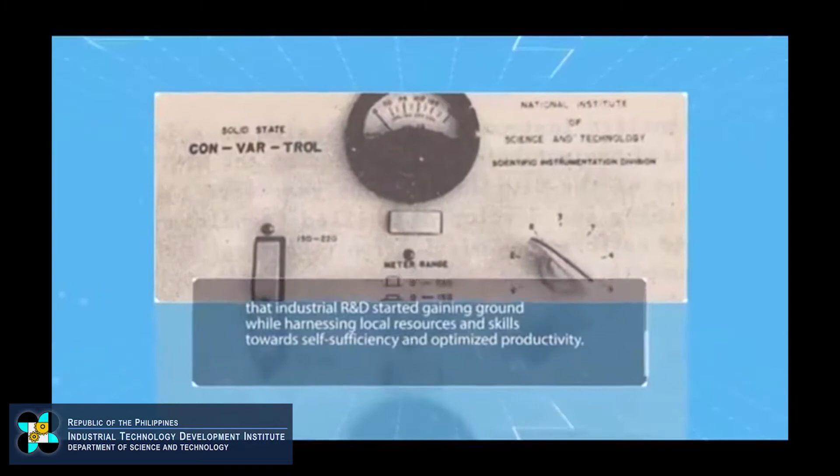It was 1958 when the Bureau of Science became the National Institute of Science and Technology, NIST, that industrial R&D started gaining ground while harnessing local resources and skills towards self-sufficiency and optimized productivity.

Industrial R&D went full gear in 1987 when the NIST was renamed Industrial Technology Development Institute, focusing on 4 major functions: research and development, technical services, technology transfer, and custodian of the national units of measure to provide international traceability.

DOST-ITDI research and development covers 5 major areas: food, environment and biotechnology, chemicals and energy, material science, and packaging technology, all aimed at supporting and answering the needs of local industries.

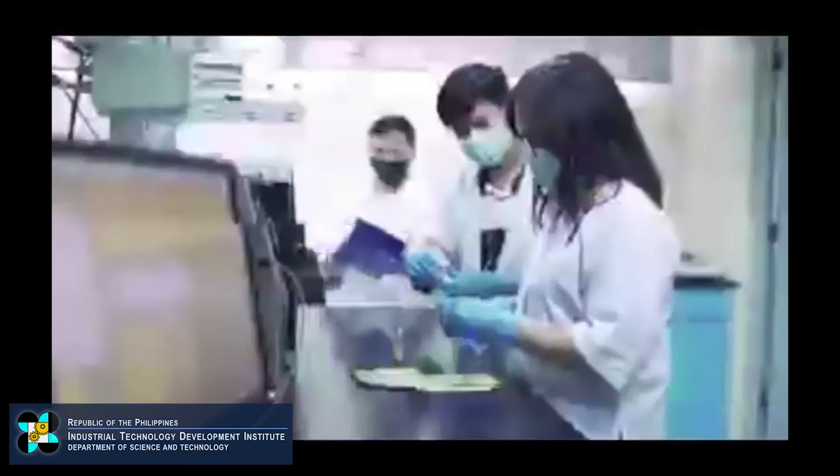Complementing its R&D are its technical services: standards and testing, national metrology, and technology transfer, aimed at harnessing local industries' productivity and competitiveness, and translation of developed knowledge or innovation into the production sector, paving the way for new businesses or startups. As well, DOST-ITDI innovations serve as springboards for businesses to thrive and prosper.

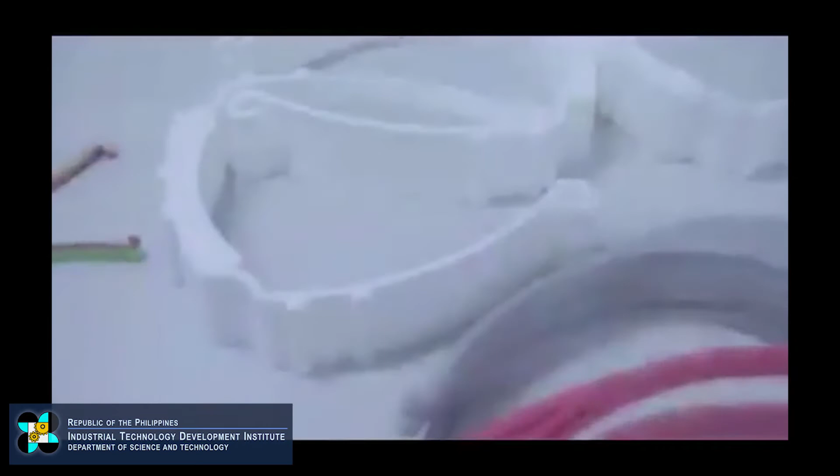At the height of the COVID-19 pandemic, and when most of the country was in enhanced community quarantine, DOST-ITDI bravely rose to the call of duty, distributed ready-to-eat foods such as the Pack of Hope and Mungbean Cocoa Milk Drink to our frontliners in Metro Manila and other regions in the country, produced face shields via 3D printing and donated these to hospital frontliners, developing prototypes and 3D printing critically important parts of hospital equipment, and improved design of N95 masks to better protect the frontliners.

The Institute is also providing interventions for our displaced countrymen who lost their jobs and livelihood by making training available online whenever necessary. And even before this pandemic, DOST-ITDI innovations were critical in rehabilitating communities that experience calamities and even war, and make them whole again.

DOST-ITDI has been preparing for an innovative ecosystem for new knowledge and technology to thrive and help make us ready for Industry 4.0. DOST-ITDI aims to achieve kaayusan and ascertain the future or kinabukasan through its initiatives and help businesses and every Filipino adapt to COVID-19 under the new normal.

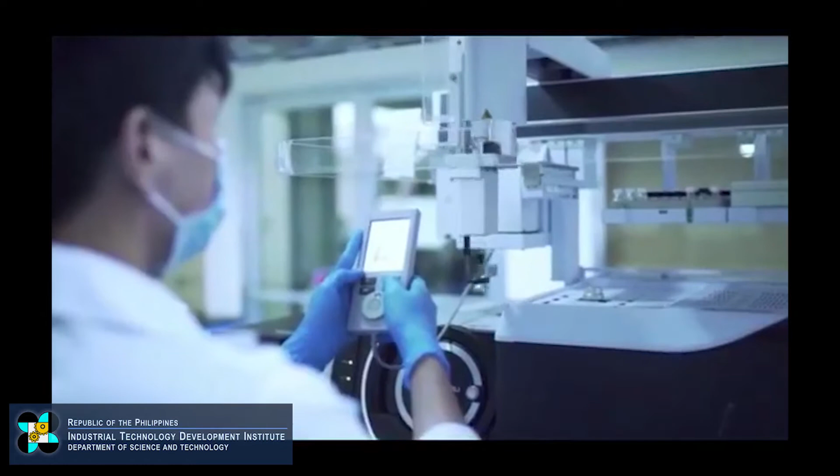State-of-the-art facilities are being established. Construction of the Simulation Packaging Testing Laboratory, SPTL, and Green Packaging Laboratory, GPL, is ongoing. At the SPTL, stress conditions that affect products during transport are simulated that can help mitigate losses during distribution, while produced products can be processed and packed in a green packaging laboratory.

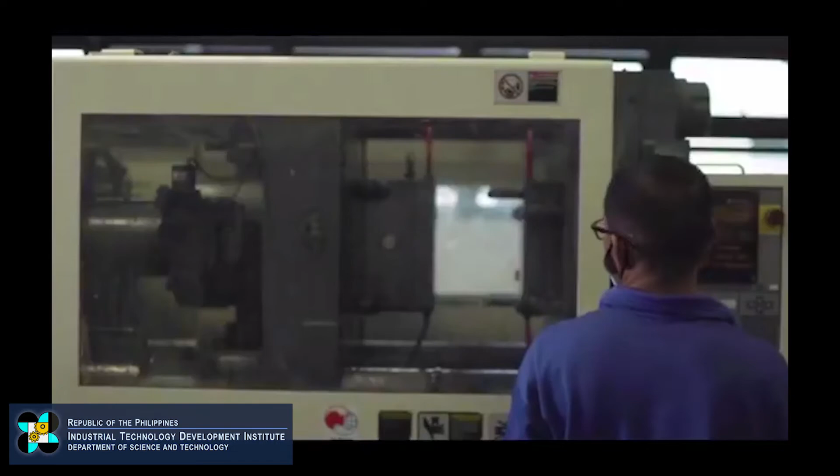AMCen, or the Advanced Manufacturing Center, DOST's 3D Printing Technology Center, is a joint project with Metals Industry Research and Development Center, MIRDC. ITDI focuses on developing multiple 3D printing materials from local materials to reduce cost.

Halal Food Research and Development Facility. With this facility in place, the Institute hopes to develop new food products that are compliant to halal standards and as well support DOST as it responds to Republic Act No. 10817, or the Philippine Halal Export Development and Promotion Act.

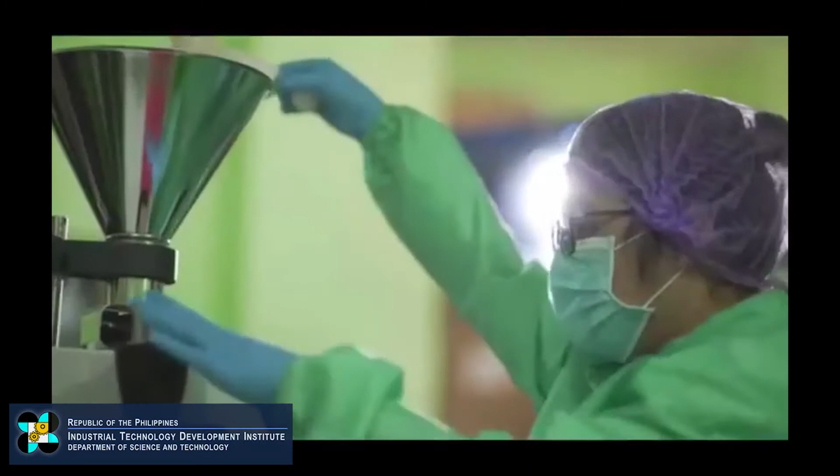Enhancement of the competence and capabilities of the National Metrology Laboratory of the Philippines. Expertise and facilities are being upgraded, and construction of laboratory facilities for metrology and chemistry and biology are now ongoing. It is envisioned that the NML will provide the country with credible measurements and traceability in the fields of physical, chemical, and biological metrology. And with the emergence of the COVID-19 pandemic, DOST response has been decisive.

With the support of President Duterte and the Interagency Task Force for the Management of Emerging Infectious Diseases, the DOST will establish the Virology Science and Technology Institute of the Philippines, or VIP, to be constructed at the new Clark Economic Zone in Capas, Tarlac. The VIP shall be pursuing priority virology research and developing diagnostic kits, therapeutics, and vaccines for diseases caused by viruses, where DOST-ITDI will have a critical function.

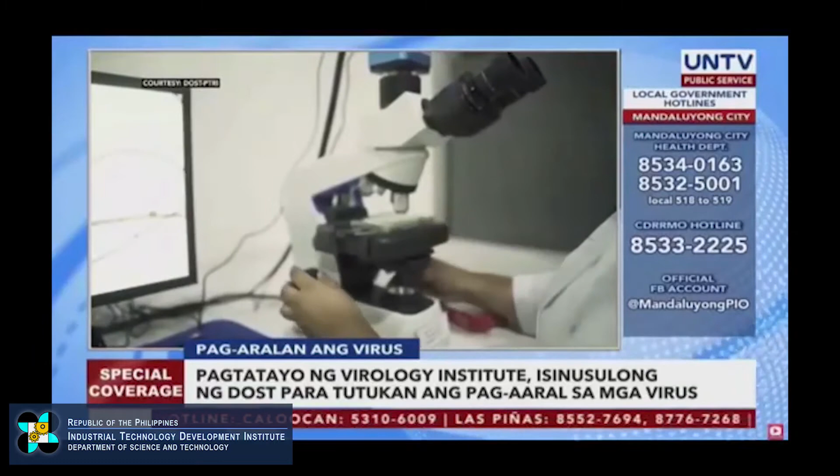From laying the groundworks for science and technology in the country, the Industrial Technology Development Institute of the Department of Science and Technology, through the years, which turned 119 last July, has been consistently providing innovations to industry to help make them competitive, emerging as a credible industry partner. The Institute has been instrumental as well in mitigating hazards and improving the lives of disaster victims and communities to rise again.

With so much optimism with this cooperation and bridging of talents and expertise, we look forward to enhance science, technology, innovation, competitiveness, and the emergence of new research and development capabilities that hopefully will translate into new products, services that meet the current and future needs of our nation and the people.

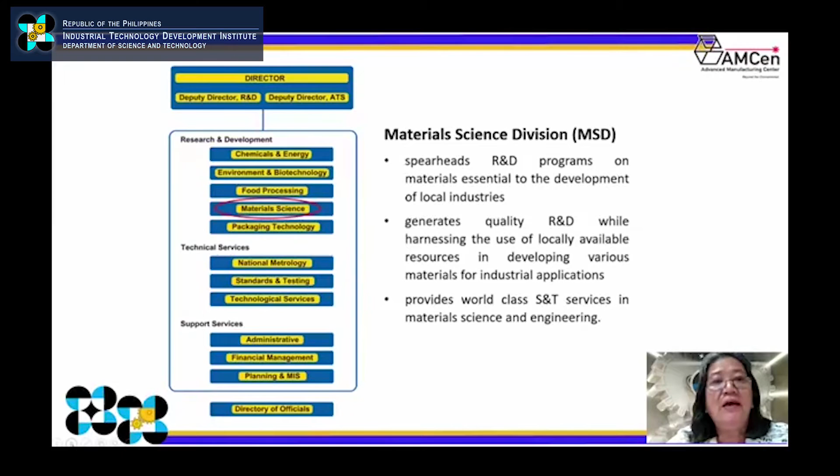The functions of the Material Science Division are as follows: to undertake research and development on material science and engineering, especially in the areas of advanced materials, surface engineering, and special materials; to undertake technology transfer of generated technologies; to provide technical assistance and support services to clients such as industry and academia related to the division's field of expertise; and to contribute in the planning and implementation of the Institute's programs and projects. To perform these functions, the Material Science Division has 3 sections.

The Advanced Materials section undertakes R&D on polymers, natural fiber reinforced nanocomposites, and quantum dots. The Special Materials section undertakes research on ceramics, particularly for water purification and filtration, and mineral processing and utilization for the production of nanomaterials and their applications. The Surface Engineering section conducts research on corrosion, surface coatings, and membranes.

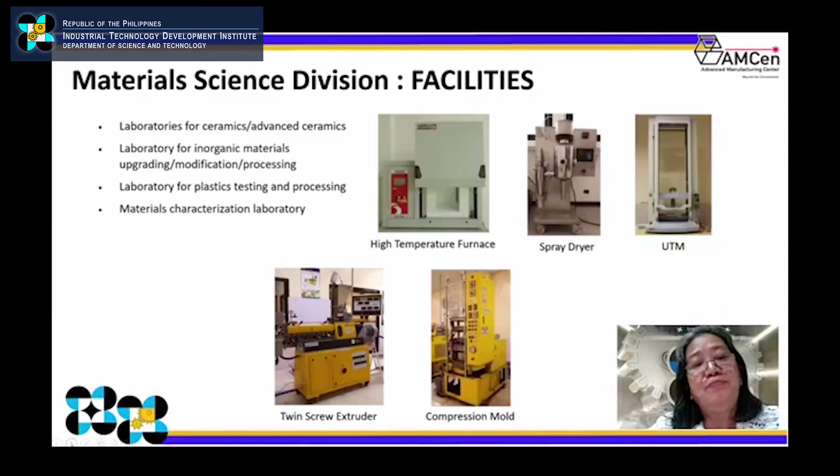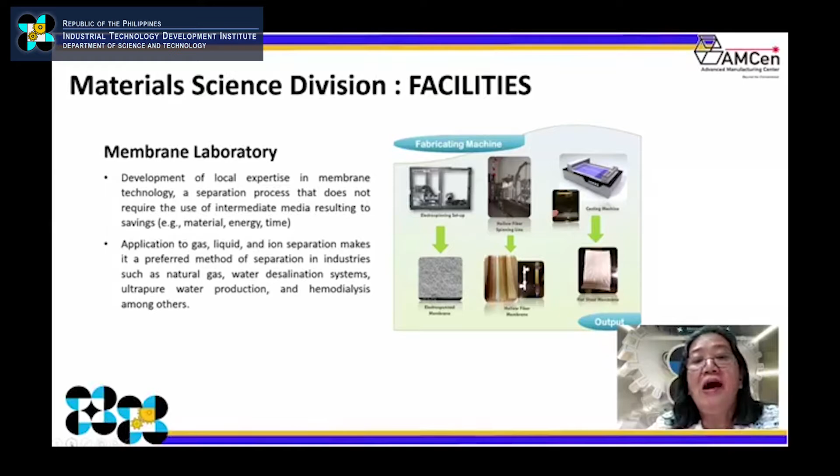Next slide, please. To develop local expertise in membrane technology, a membrane laboratory was set up in 2018, and the following fabricating machines were acquired: a fabricating machine for electrospinning, hollow fiber spinning, and a casting machine, to develop different types of membranes like electrospun membranes, hollow fiber membranes, and flat sheet membranes.

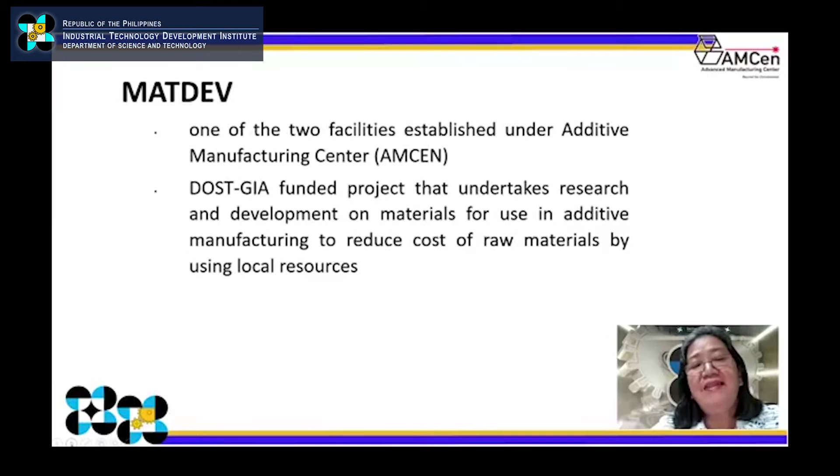I will not talk about this because the next succeeding resource speaker will give you a detailed presentation about the profile, services, and facilities of MATDEV. With that, I would like to end my presentation and thank you for your attention.

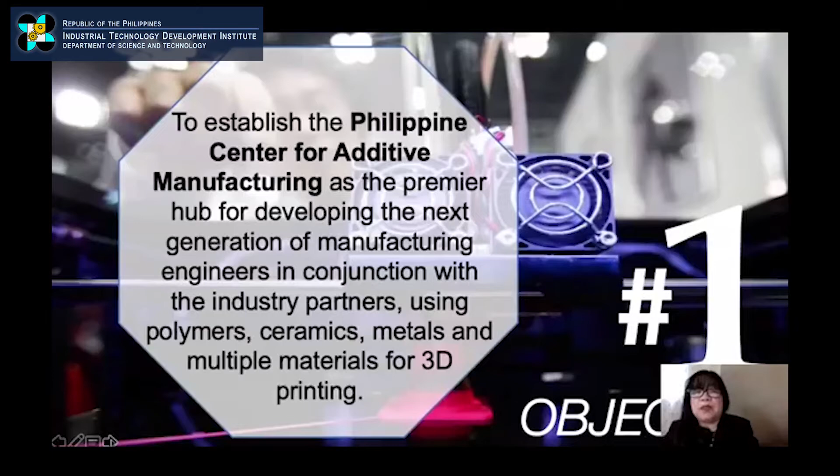The general objective of the program is to establish a national center of excellence in additive manufacturing, or AM, with the following objectives. First is to establish the Philippine Center for Additive Manufacturing as the premier hub for developing the next generation of manufacturing engineers in conjunction with industry partners using various materials such as polymers, ceramics, metals, and multiple materials for 3D printing.

Next is to be the nation's leading research center in 3D printing and achieve prominent and outstanding breakthroughs in the research and development of innovative 3D printing technologies, processes, and materials. Third is to enhance our capability in the design, materials development from local sources, testing, and prototyping of products for additive manufacturing.

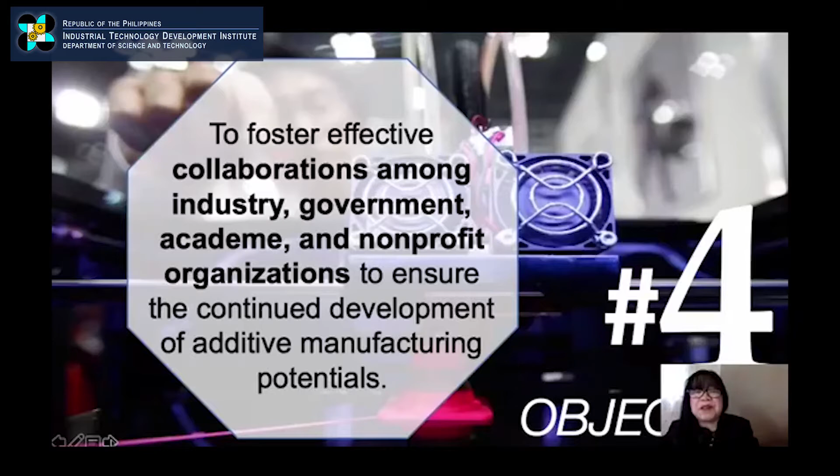Fourth is to foster effective collaborations among industry, government, academe, and nonprofit organizations to ensure the continued development of additive manufacturing potentials.

The following services will be offered by the center: training services on design software, equipment operation of various 3D printing platforms, and materials development, among others. We will also offer materials R&D using indigenous sources, prototyping, materials and product testing and evaluation, R&D collaborations with the academe, industry, government, and private entities, design concepts, policy standards development, and education formation, or for AM to be part of the curriculum.

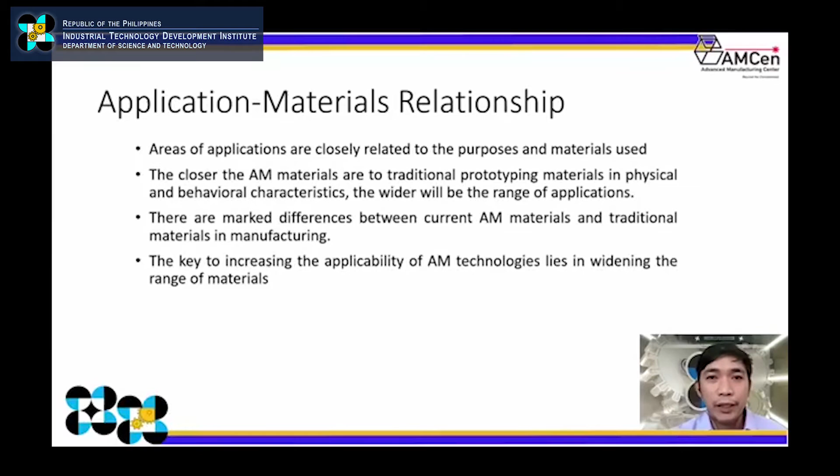Additive manufacturing was also called 3D printing before, and rapid prototyping, and now they can also refer to it as digital manufacturing. Basically, the application of additive manufacturing is limited by the materials. If you want to 3D print something, you must find a material that is 3D printable. So applications need to be identified, and through MATDEV, we can develop the materials we can use for 3D printing the things you want to use or 3D print.

So 3D printing, or the application of 3D printing, depends on materials, and there are three basic classifications of the applications of additive manufacturing: first is design, second is engineering, analysis, and planning, and manufacturing and tooling.

For the design, you need to do some design validation, or sometimes you just need to see something out of a drawing from the CAD, or an ultrasound.

So if they touch it, they will see it in such a way as before it was born. Here, one advantage of additive manufacturing is design freedom.

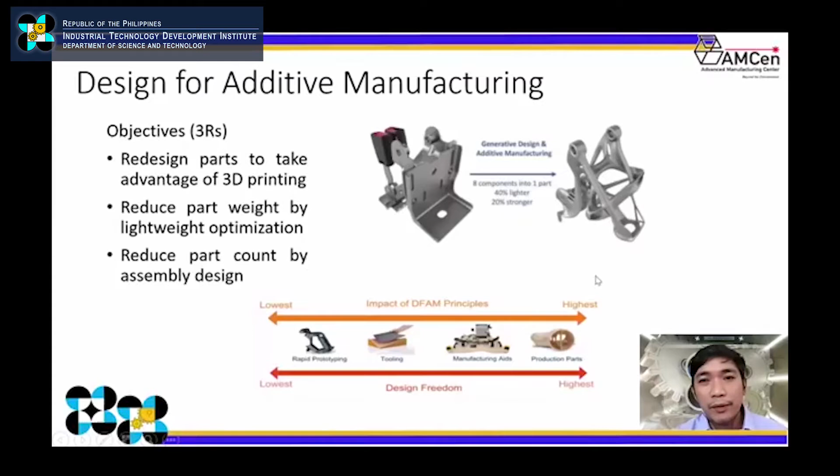Complexity is free. In many cases, like this application, they make use of 3D printing. If you 3D print the usual things, you cannot take advantage of the whole 3D printing process. So what you may do is redesign or do some generative design through artificial intelligence. From this, they reduce the weight by about 40% and make it stronger by 20%, going from 8 components into 1 part, preventing failure at various connections or the screw that is the cause of failure of this particular part.

And they use 3D printing for commercial purposes and sometimes in movies for the effects, using various materials with a colorful effect on the 3D printed products.

Another application of 3D printing. I'm discussing some applications that are interesting, and the application of 3D printing is limited only by your imagination. So if you can think of some applications, that's also possible. That is very, very possible.

One interesting application of 3D printing is in mock-up, pre-production, or 3D printing of obsolete parts. This is very useful before launching a product that is functional in nature. For obsolete parts, some assets, like in the government military of the Philippines, sometimes have obsolete assets because the part is not available anymore. But through 3D printing, we can print this part and make these assets useful again, and perhaps prevent accidents like the helicopter incidents that happen in the military because of obsolete parts that are no longer in production.

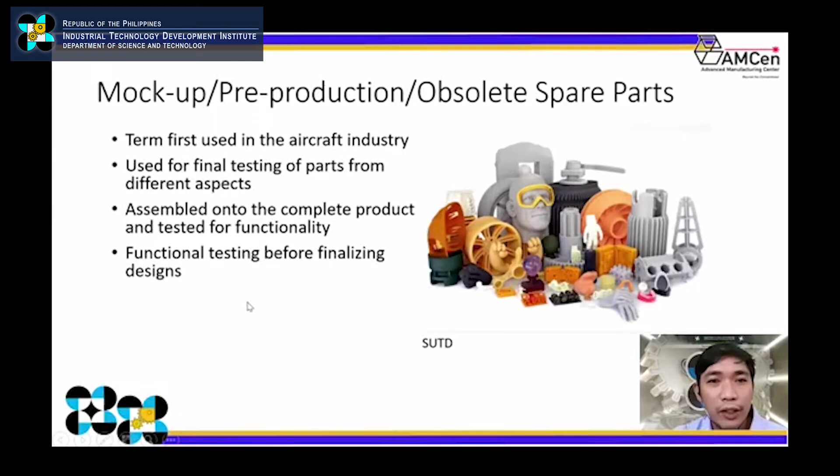Another application is in building and construction. The advantages of this are zero waste construction, time and cost reduction, and support for unusual design. In Dubai, they have 3D printed buildings—the largest in the world, about 640 square meters. And they plan to construct 25% of the buildings in Dubai using 3D printing.

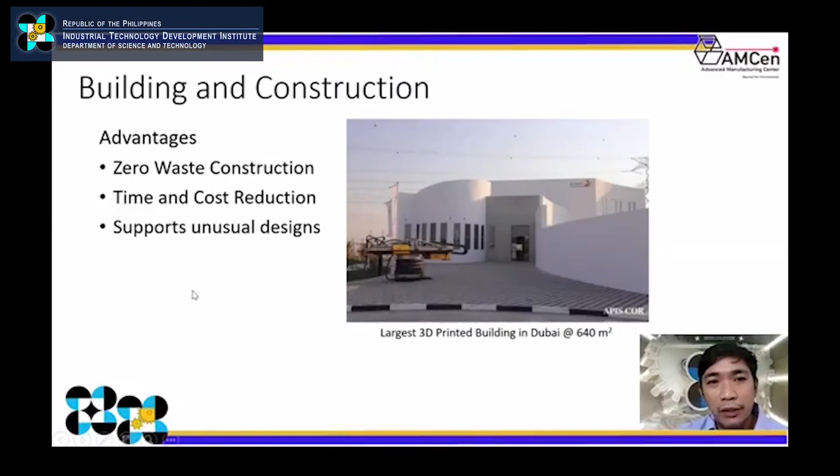Another application is in the planning and simulation of complex surgery. Actually, this is already done at UPPGH. There's a surgeon, Dr. Bondoc, who is also part of our steering committee of the AMCen. Before the conceptualization of the program, he was already using 3D printing to plan surgery, making surgery faster, enabling recuperation of the patient, enabling a precise model based on CT scan, so they can move better and maybe reduce human error in surgery. And another application is in dentistry.

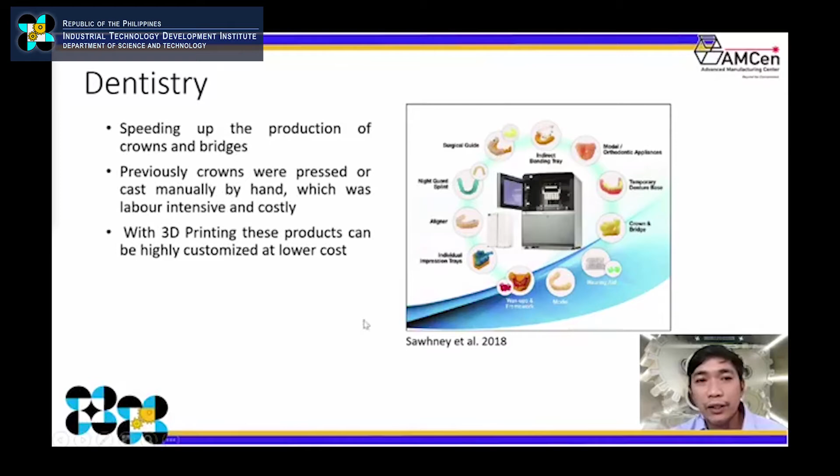Imagine crowns, bridges, and also dentures. Sometimes the usual conventional process takes time to make this part available, since it is highly customized—they make a mold out of your jaw. But with 3D printing, perhaps you can do this within the day—within 24 hours these parts could already be available.

Another application is customized implants and prosthesis, which some patients could require. Through 3D printing we can customize these parts according to the needs of the patient, and we can introduce porous structures that facilitate cell growth. We are envisioning having 3D printing in every barangay that could serve people with amputated limbs or hands, so they can print these prosthetics conveniently.

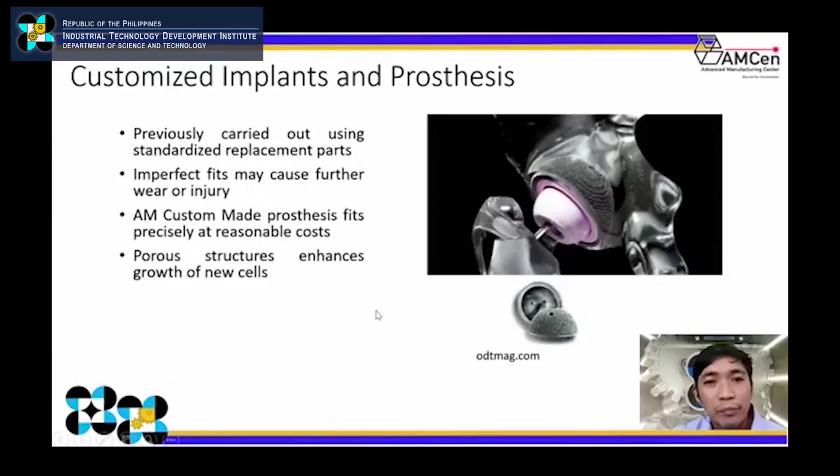Another application, similar to the previous one, is tissue engineering scaffolds. As mentioned by the Secretary, you can 3D print body parts by printing cells or printing scaffolds where you can grow the cells.

Another interesting application is for wildlife conservation, and there's this company, Pembient—a startup that fabricates wildlife products.

This is a rhino horn, which has illegal trades and a black market. Through 3D printing and biotechnology, they have imitated this exactly, indistinguishable from the real one, and with this they can reduce the price of these products and suppress or discourage the black market or illegal trade of this wildlife product, thereby conserving the endangered species.

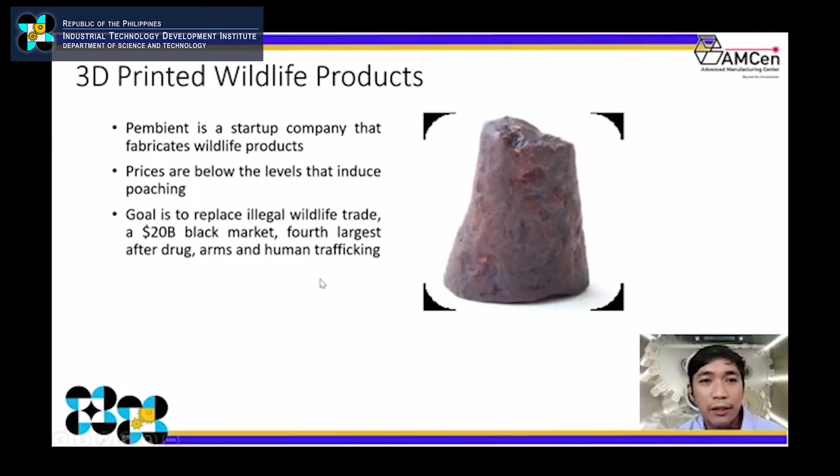They have some injuries caused by long-term wearing of the face mask or PPE. Actually, one of the designs created for this was made by a grade schooler. So imagine, 3D printing is not only for adults. Maybe in some countries they already include it in the curriculum, and some students in grade school are already using 3D printing for their academic requirements.

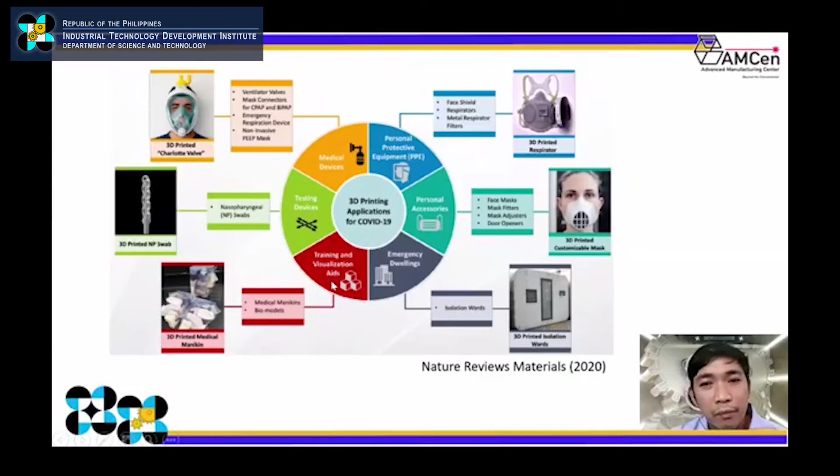Given that, what I presented are not the only applications of 3D printing. Actually, there are many applications of 3D printing you can think of. This technology is very disruptive. You can disrupt the supply chain, you can disrupt the applications, and yeah, this is very useful.

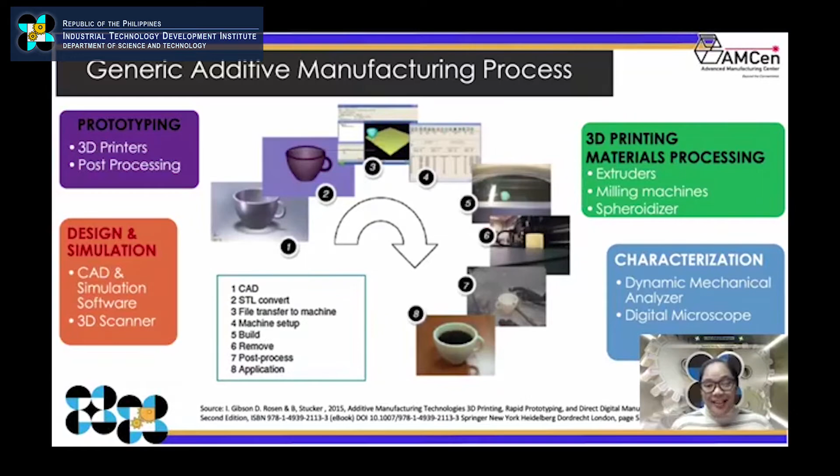So as I said a while ago, our center has the software, and we also have the Artec Spider scanner for scanning small objects. So yes, the first thing that we need is to have an STL file.

And we actually have three ways of obtaining an STL file. We can either download some free files online, or you can design your own, generate your own STL file using software like SolidWorks. And the third way is for you to scan your object and edit it, improve it using SolidWorks.

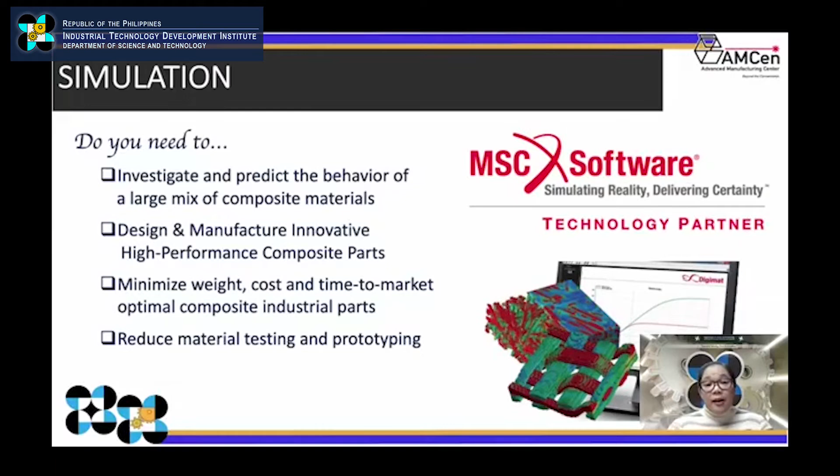Now, aside from SolidWorks, we also have simulation software from MSC that will help you simulate the structural behavior of your given formulations. Say you have limited materials and you would like to simulate what will be the structural behavior of your composite formulations.

Now, after you have the STL file, you can now proceed to 3D printing. MATDEV has the following AM technologies for your printing needs. We have several desktop printers, using material extrusion, vat polymerization, and powder bed fusion.

For material extrusion, this is likened to the principle of a glue gun, where you melt the plastic, and that plastic can be deposited on the build plate. For vat polymerization, it utilizes photopolymer resin that cures when exposed to light.

And for powder bed fusion, it utilizes polymer powders that are fused according to the STL design that you have.

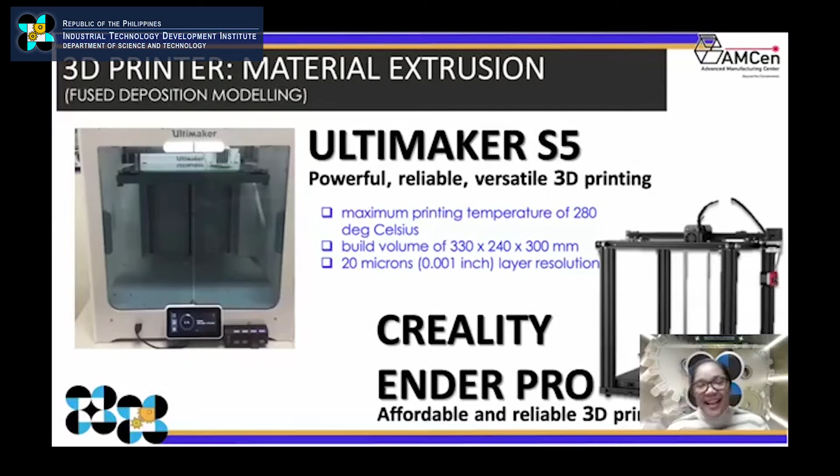We also have the MarkForged Mark Two. This is also a low temperature printer, a fused filament fabrication with continuous fiber reinforcement. The unique part about this printer is that the filament is reinforced with fibers, such as carbon fiber, fiberglass, and Kevlar. This printer and the one I mentioned can print polymers at a temperature of 280 degrees Celsius.

Now moving to the last type of printer under material extrusion, the Intamsys FunMat Pro. This printer can process high temperature filaments in addition to regular filaments, with a maximum printing temperature of 500 degrees Celsius. It can process several high temperature filaments such as polyether ketone, polyether ether ketone or PEEK, and polyether ketone ketone or PEKK, among others.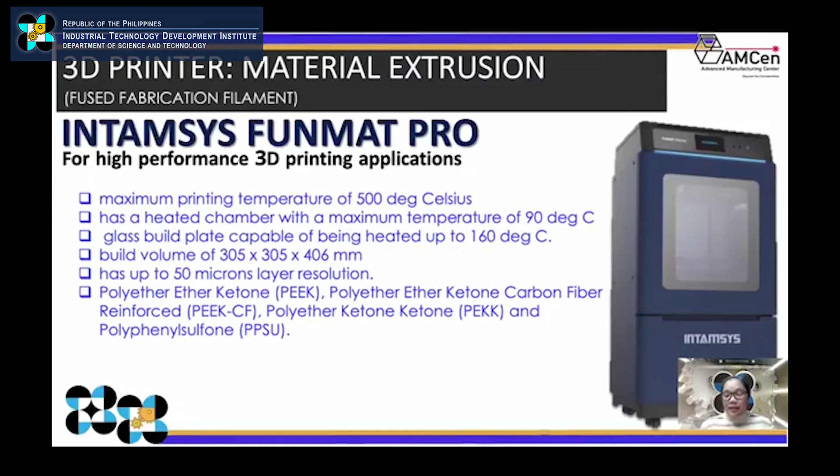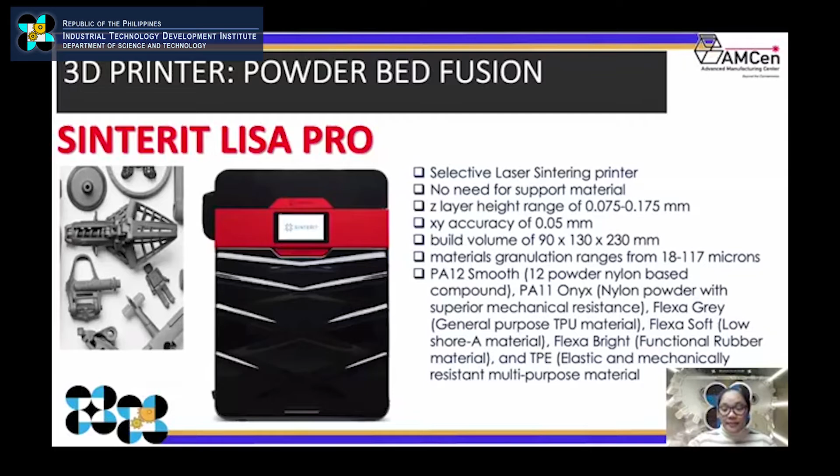As I said a while ago, the forte of this laboratory is developing 3D printing materials for several printers. That's why our printers are desktop only for now, because MIRDC houses the desktop and the big equipment.

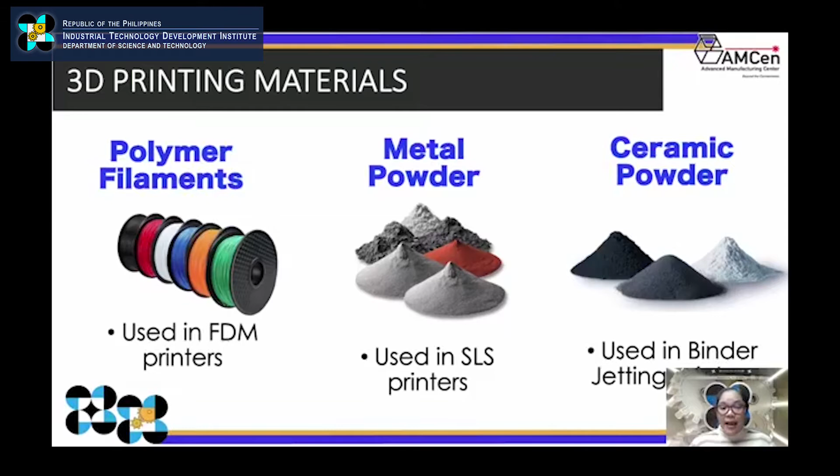So now going back to 3D printing materials, we need polymer filaments, metal powders, and ceramic powders. And we are happy to tell you that MATDEV has the equipment to process and characterize those 3D printing materials.

We have several 3D filament makers that can process filaments of up to 450 degrees Celsius. We can make composite filaments. The best thing about this filament maker is that we produce uniform filaments, which is very critical so that our FDM printers don't clog.

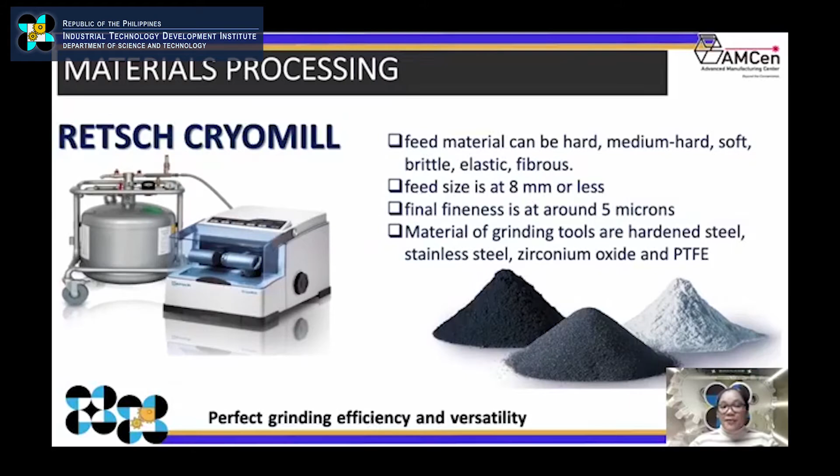For grinding metals or hard materials, medium hard, soft, brittle, elastic, or fibrous materials, we have several milling machines. One of these is the Retsch cryo mill. Another is the Retsch ball mill. And we are very happy to tell you that MATDEV houses the very first spray dryer in the Philippines and even in the ASEAN region. This equipment improves metal and ceramic powder flowability. Even residue metal powder from our metal printers can be recycled using this equipment.

Now, aside from the processing equipment, our laboratory also houses some characterization equipment, including a digital microscope and a dynamic mechanical analyzer.

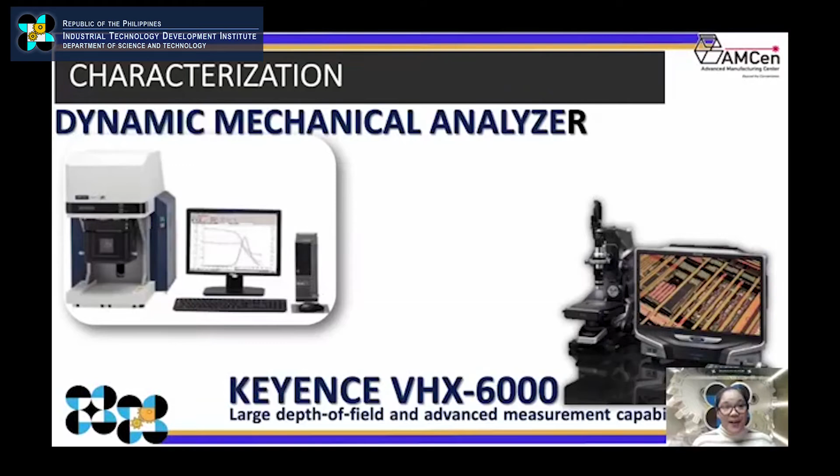And MATDEV laboratory is complemented by other ITDI laboratories. We have access to several processing and analytical equipment from the DOST-ITDI Nano Lab, which was already explained by Ma'am Josie a while ago. We have the two-roll mill, twin screw extruders, and TEM.

Aside from that, we are also complemented by access to ADMATEL for analytical tools that may require FESEM, TOF-SIMS, TMA, or differential scanning calorimetry, among others.

So in summary, MATDEV houses design and simulation software. We have 3D printers, and we have processing and characterization equipment for the development of your 3D printing materials.

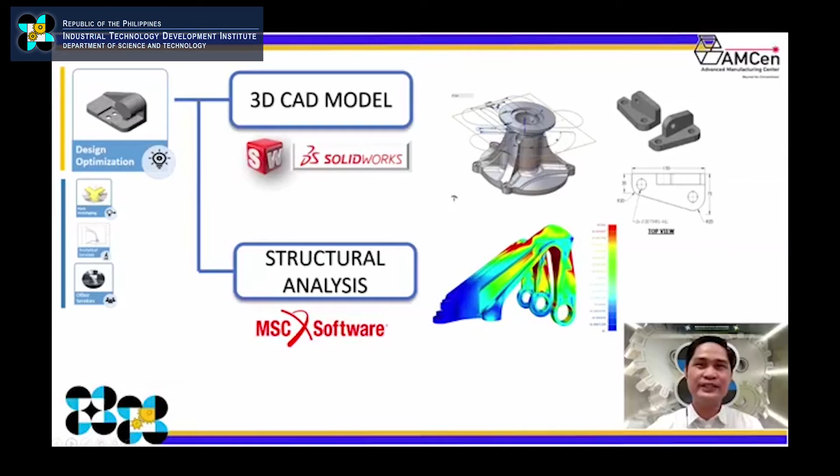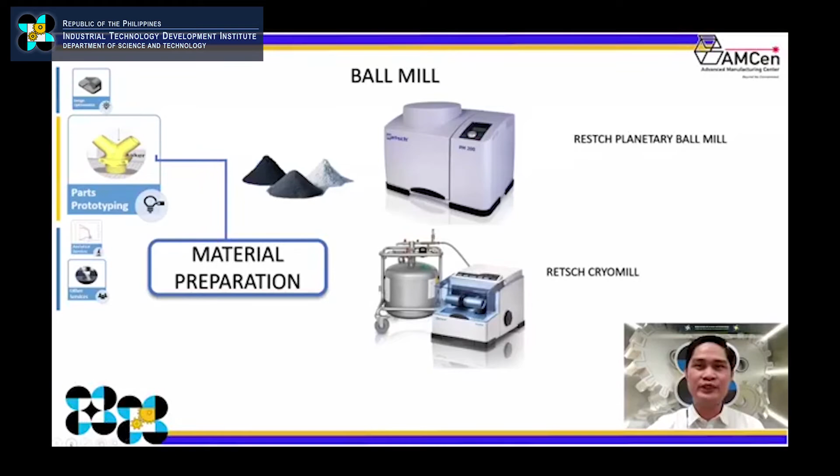Next slide. For parts prototyping, MatDev does not simply offer 3D printing services, but also some of the needed tools for material preparation. We have two types of ball mills, for example, that can produce powders depending on your material and processing requirements.

For the processing of metal powders, MatDev has the Tekna spheroidizer, which is important for applications or methods that require spherical powders to ensure a dense part or defect-free layers.

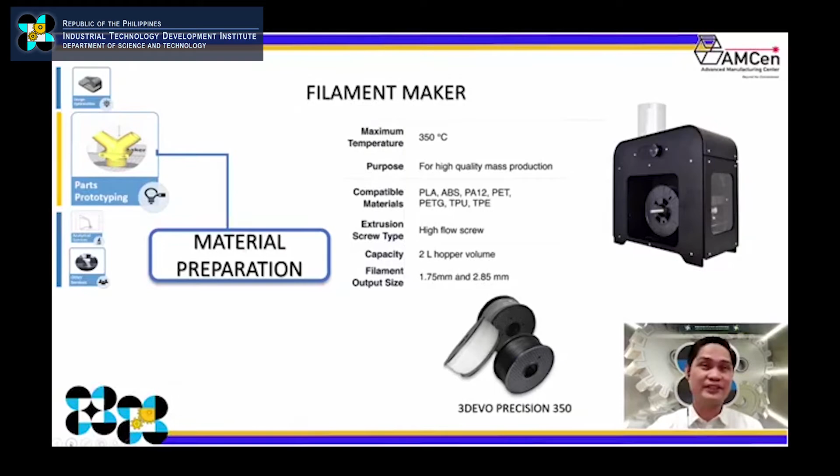Having a suitable 3D printable material is also a challenging yet rewarding aspect of prototyping. One important stage in prototyping, especially those that include product development, is the preparation of filaments for fused deposition modeling. MatDev has different types of filament makers, like the 3DEVO Precision 350, which can be used for high-quality mass production. We also have the 3DEVO Composer that can be used for material mixing and experimentation, an example of which is the production of filaments from PLA containing different local reinforcements.

For plastic materials that need initial size reduction, MatDev also offers its plastic shredder. This is an important tool, especially for processing recycled plastics.

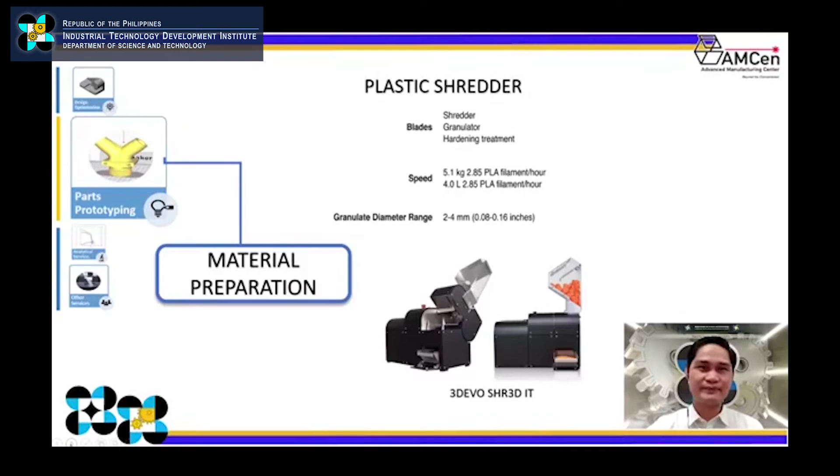Of course, part prototyping will not be rapid without 3D printing. So MatDev houses a good number of 3D printers that cater to different materials or application requirements. One of the commonly used FDM printers at MatDev is the Ultimaker S5. Our 3D printing service is reasonably priced and already includes materials such as PLA or ABS and the use of the printer for 8 hours.

If you need to 3D print high-performance polymers such as PEEK or PEI, which can be used as a substitute for some metals, or even custom-made implants, MatDev has this Intamsys FunMat Pro that can reach nozzle temperatures of up to 500 degrees Celsius. Shown on your screen are the tentative amounts for an 8-hour use using the indicated material types.

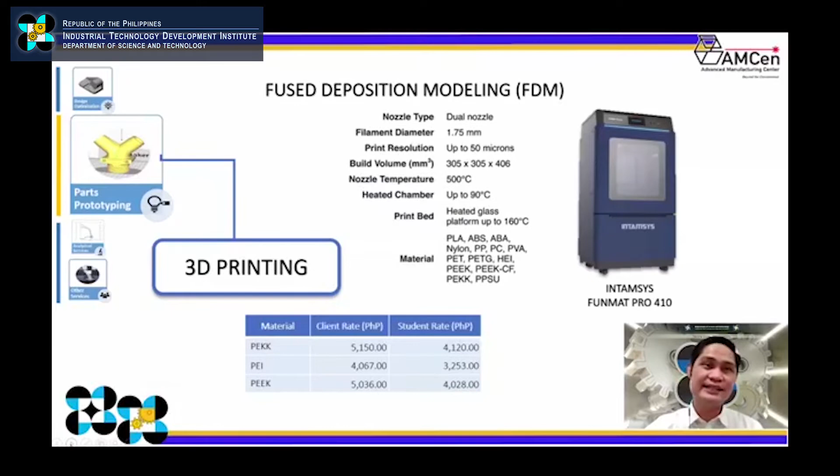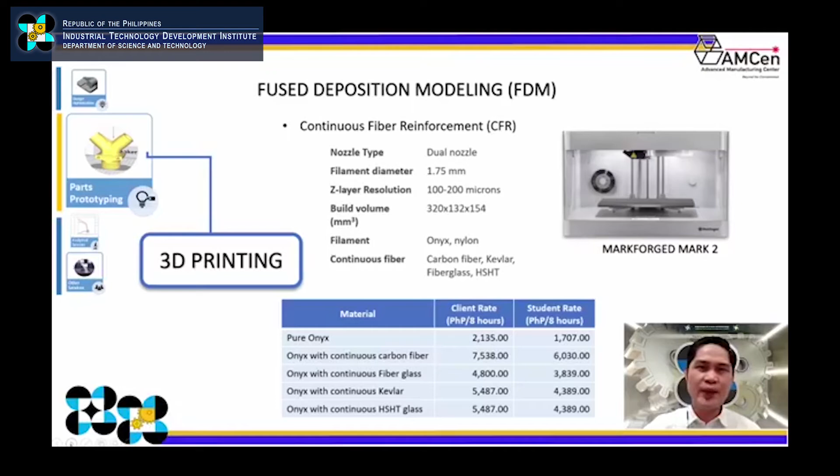The Markforged Mark Two will be your choice for 3D printing using continuous fiber reinforcements, such as micro-carbon filled nylon called Onyx, containing continuous carbon fiber, Kevlar, or fiberglass. The choice of material will depend on whether, for example, you want your material to be highly impact resistant, ultra-high strength, or even perform well in high temperature environments.

Another 3D printing technique makes use of powder bed fusion technology, which offers its own unique advantages, like printing movable parts and working mechanisms at one go. As with some of the specialized MATDEV equipment mentioned earlier, it is recommended that you discuss your processing requirements with our MATDEV staff to determine the appropriate approach.

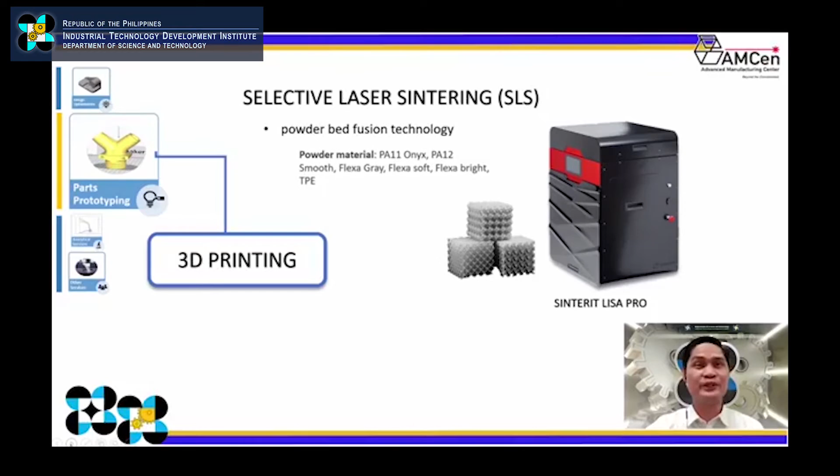At MATDEV, we also believe that continuous material improvement involves analysis of both the raw materials and the finished products. That is why we offer different analytical services to ensure the quality of materials. One of these tools is the digital microscope. We offer both 2D and 3D imaging, which may also include measurements such as length, area, and many more.

The DMA, as mentioned earlier, is a special tool to determine the viscoelastic properties of your material, especially polymers. DMA can be used to mimic operating conditions of the material that can be used to predict how the material will perform. At present, we offer determination of glass transition temperatures at both positive and negative temperatures.

As also mentioned in the previous presentations, what is special about MATDEV is its connection to other ITDI or DOST laboratories, which means you have almost everything you need, from material preparation up to product analysis, in just one place. I would like to point out, for example, that aside from the filament makers we have at MATDEV,

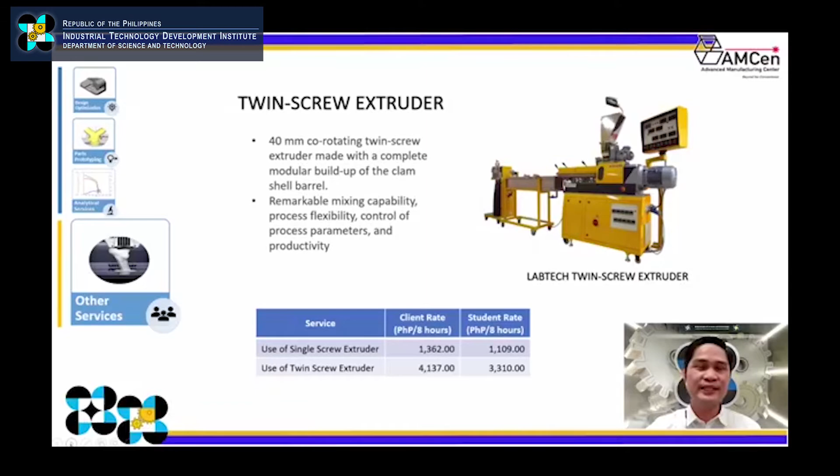we also offer the use of single screw and twin screw extruders at the Material Science Division. We also have a whole bunch of other technical services, such as elemental analysis, particle size analysis, surface roughness, and TEM imaging, all available at the Nano Laboratory.

MATDEV is also open for long-term engagements, such as R&D collaborations, contract research, or even trainings. It is our desire that AMCen and MATDEV in particular not only become a service provider, but really a partner, a collaborator in your additive manufacturing endeavors.

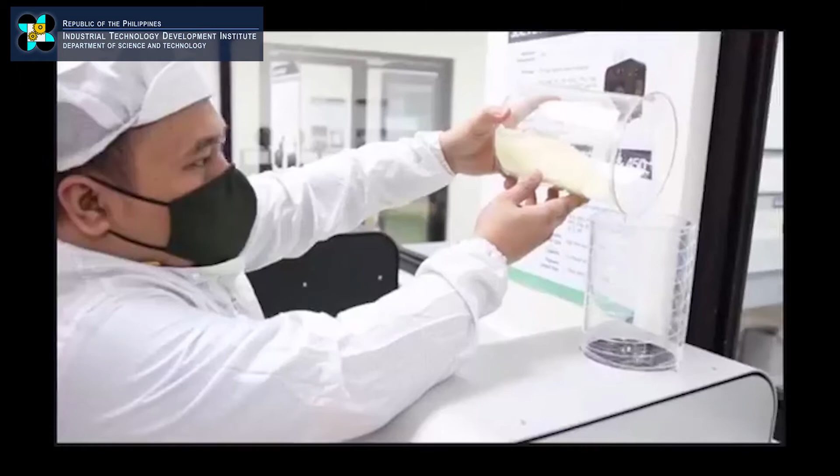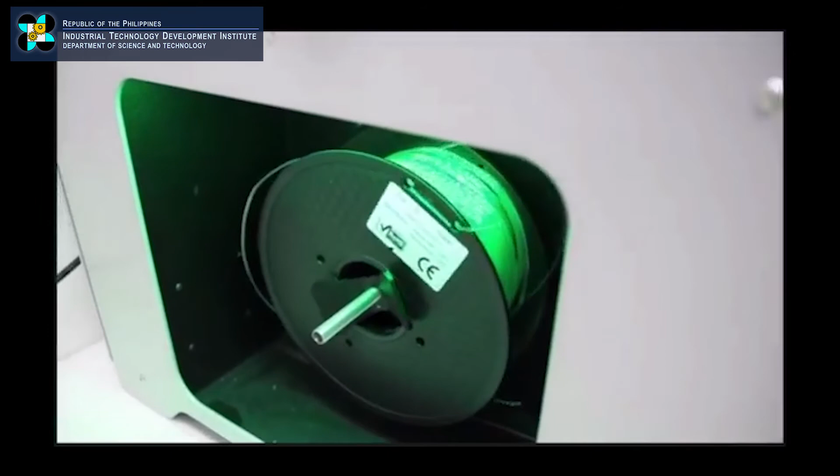Hi, I'm Maris. The Composer 350 and 450 are compact desktop filament makers to create your own professional materials. The Composer 350 can handle up to 350 degrees Celsius, which means it's relatively used for polylactic acid or PLA and ABS or any other low temperature thermoplastic materials. On the other hand, the 450 can process PEEK, PETG, thermoplastic polyurethane, and thermoplastic elastomer. Our 3DEVO Composer 350 and 450 has mixing parameters, which you can use to add more materials and additives.

It is also designed for effortless operation, with a very simple interface, automatic net spooling, and industrial grade components, all packed inside a compact silver powder-coated exterior, something like this one, giving you the power to create your own customized 3D printing filament, now at your own fingertips.

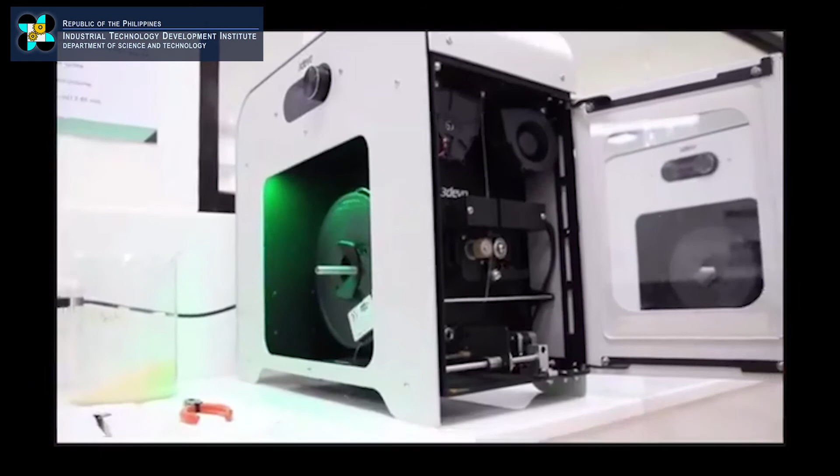The Precision 350 is a compact tabletop single screw extruder that enables quality extrusion of consumer materials such as polylactic acid, acrylonitrile butadiene styrene or ABS. It's also possible to use for polyethylene and other low temperature materials. This 3devo Precision screw offers a faster extrusion speed and steady filament flow, resulting in a more precise filament diameter we can produce here.

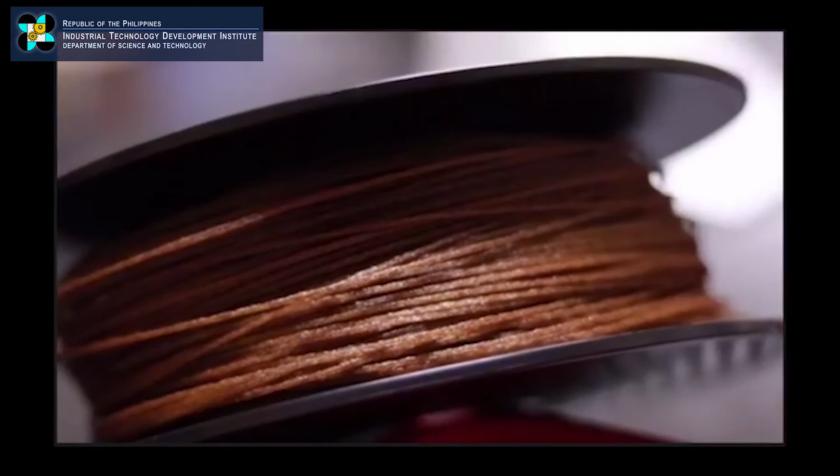It includes a simple interface and presets to make it accessible to everyone. Equipped with the next generation automatic net spooling, we have the spooling here, which prevents downtime during printing. Built in with strong, durable components, a long productive lifetime is assured for this particular 3devo Precision 350.

Hi, I'm Mark. This shredder has twin capabilities of a shredder and a granulator, together processing as much as 5 kilograms of material per hour. Old plastics can be converted into high-quality 3D printing granules of any desired size in just one run. Designed for effortless operation, the shredder features accessible compartments that facilitate cleaning, material changing, and filter screen replacement for custom grain sizes.

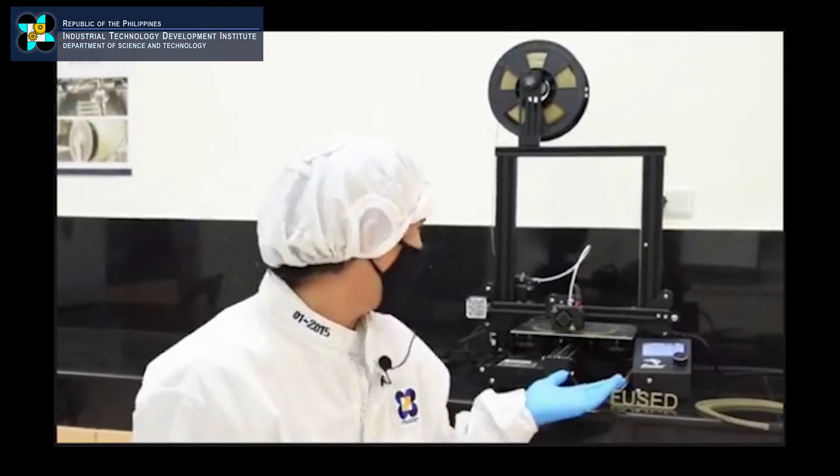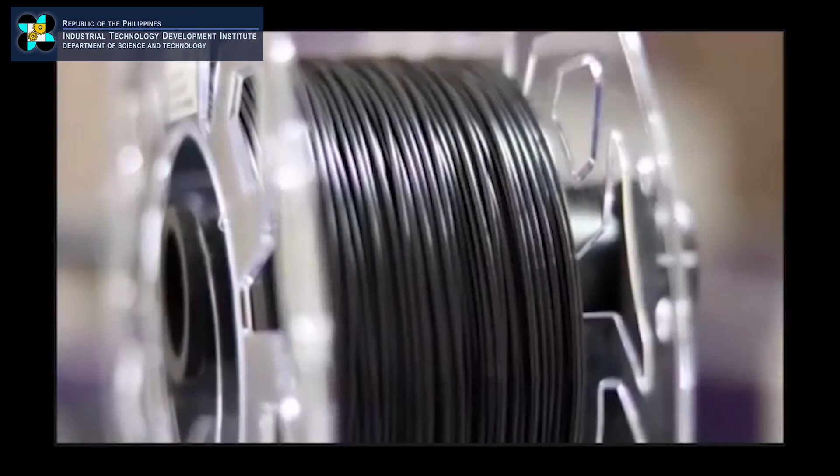Hi, I'm Alvin, and this is the Creality Ender 3 Pro. It is an affordable fused deposition modeling or FDM 3D printer which provides a decent build volume, magnetic bed, a power recovery mode, and a tight filament pathway that makes it easier to work with flexible materials. Common thermoplastic filaments such as PLA, wood composite, and TPU can be printed using this machine.

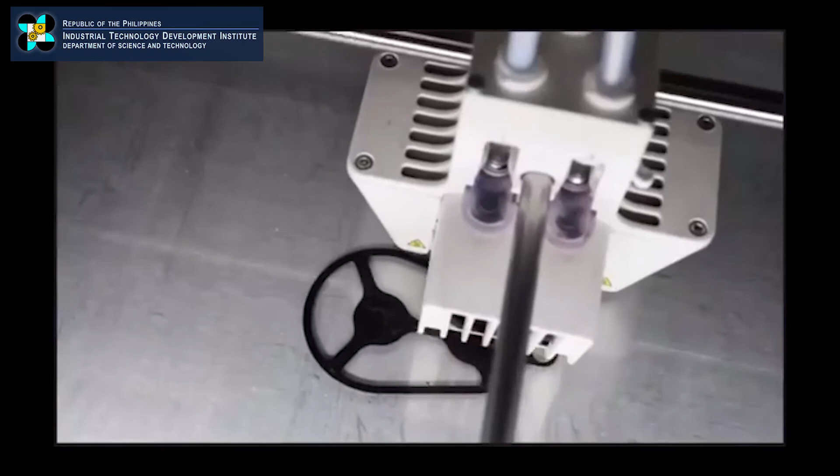Hi, I'm Buds, and this is Ultimaker S5. It's also an FDM type 3D printer that uses filament extrusion technology. A thermoplastic filament material such as polylactic acid and ABS is extruded through a nozzle and onto a build plate. The nozzle follows a predetermined path and extrudes the material layer by layer. Ultimaker is distinguished for having a dual extruder feature.

Hi, I'm Marlo. This is the FDM printer Markforged Mark Two, a special type 3D printer known for its fused filament fabrication or FFF and continuous fiber reinforcement or CFR. It uses microcarbon fiber filled with nylon for high-strength material. Aside from carbon fiber, it also supports other fibers such as Kevlar, fiberglass, and high-strength, high-temperature fiberglass.

Hi, I'm MM. This is the Intamsys FUNMAT PRO 410. This is also an FDM type 3D printer, can be used for the printing of high performance and engineering materials such as PEEK and PEI because of its high temperature dual extruder that can reach up to 500 degrees centigrade.

Next is the Selective Laser Sintering Lab, or SLS Lab. Come on, let's get inside.

Parts, PCBs, keys, coins, or even human parts. It offers new options for reverse engineering, quality control, product design, and manufacturing.

Let us now visit the Characterization Laboratory.

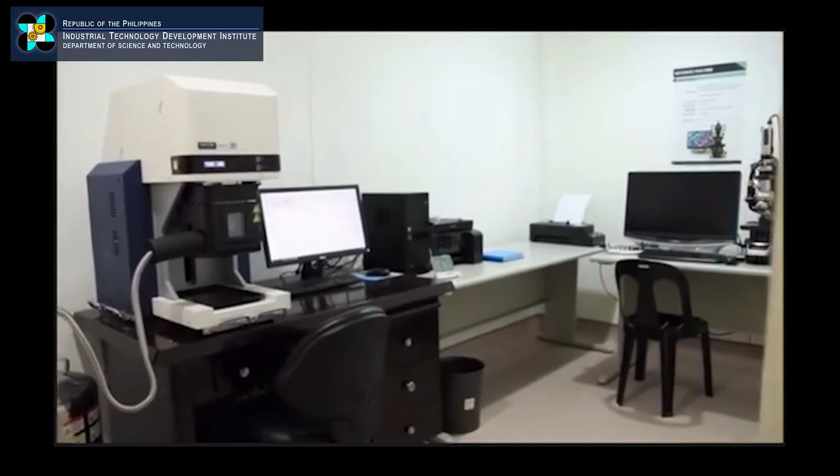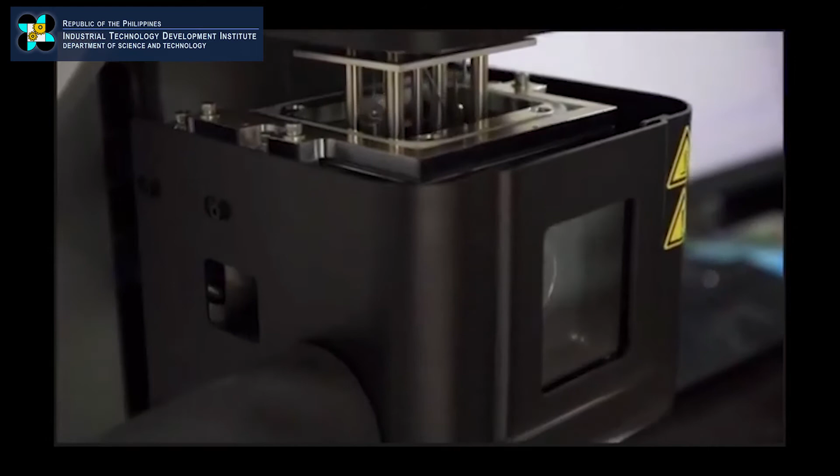Hi, I'm Josie. I'm presenting to you the Hitachi DMA 7100. The Dynamic Mechanical Analyzer, or DMA, is used to characterize the viscoelastic behavior of polymers. A sinusoidal stress is applied and the strain in the materials is measured, allowing one to determine the storage and loss moduli. The temperature of the sample or the frequency of the stress are often varied, leading to variation in the moduli. This approach can be used to locate the glass transition temperature of the material, as well as to identify transitions corresponding to other molecular motions.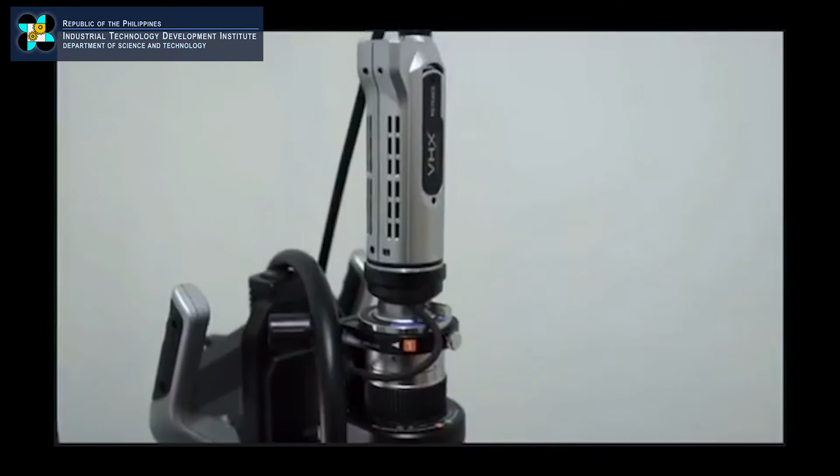Hi, I'm Lumen, and this is our digital microscope VHX 7000 by Keyence. It is a digital microscope with a large depth of field and advanced measurement capabilities for inspection and failure analysis. It was developed to improve microscopic observation through the use of adaptive lighting and focusing. It enables observation methods and three-dimensional analysis. Its magnification power can reach up to 2,000 times.

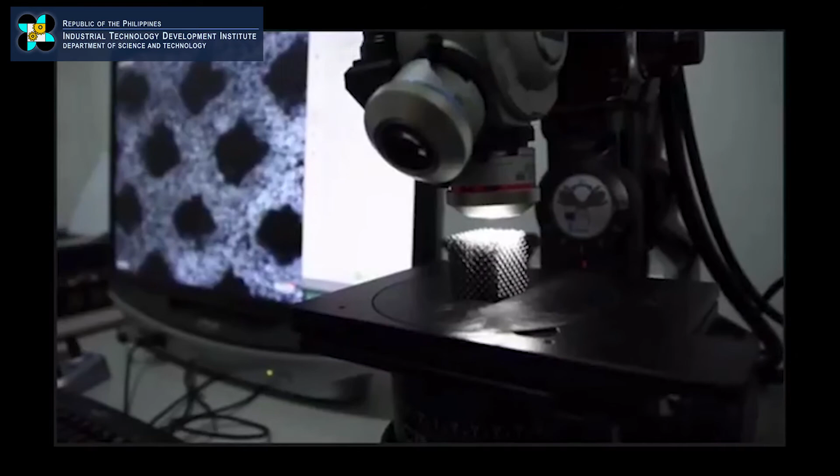The multi-lighting function enables accurate observation of previously unseen surface details such as minute cracks or defects. Real-time depth composition enables the sample to always be in focus.

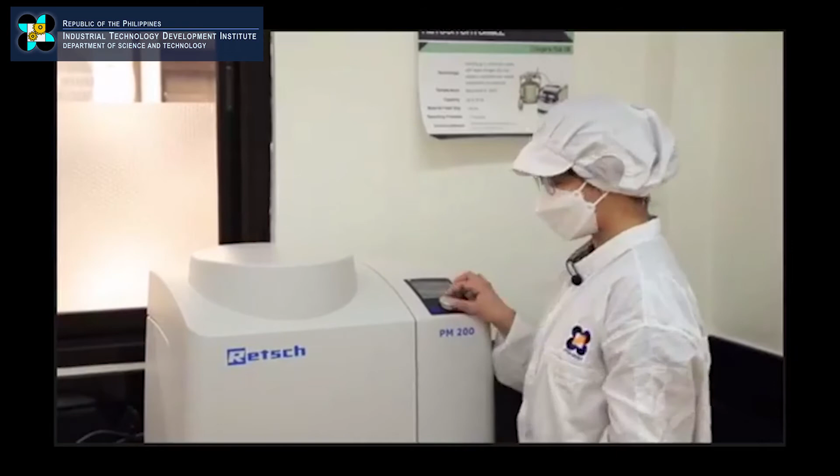Planetary ball mills are used whenever the highest degree of fineness is required. Apart from the classical mixing and size reduction processes, the mills are also capable of colloidal grinding and mechanical alloying. The extremely high centrifugal forces result in a very high pulverization energy and therefore shorter grinding time.

This PM 200 is a very convenient benchtop model with 2 grinding stations, which can process familiar additive materials such as alloys, bentonite, bones, carbon fibers, cellulose, ceramics, clay, mineral, glass, limestone, and wood.

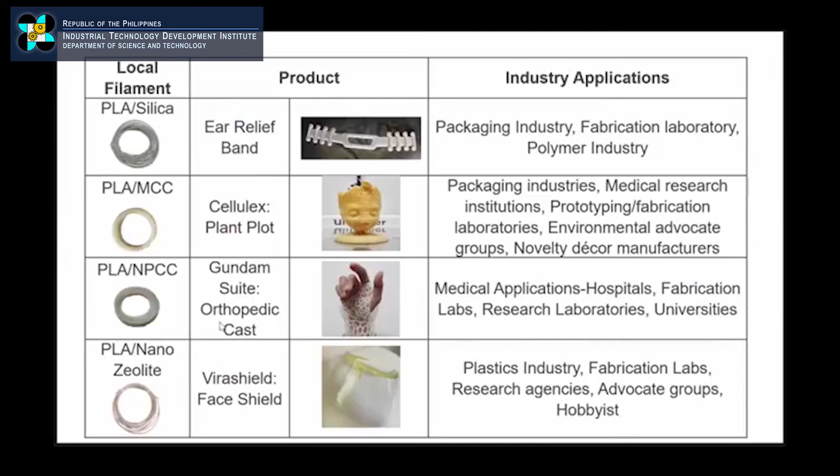So far, these are the filaments we've developed. And this one—we also developed a wood-filled filament. If you look at it, it looks like wood, so with this you can 3D print wood furniture, but the build volume or size that can be printed is limited.

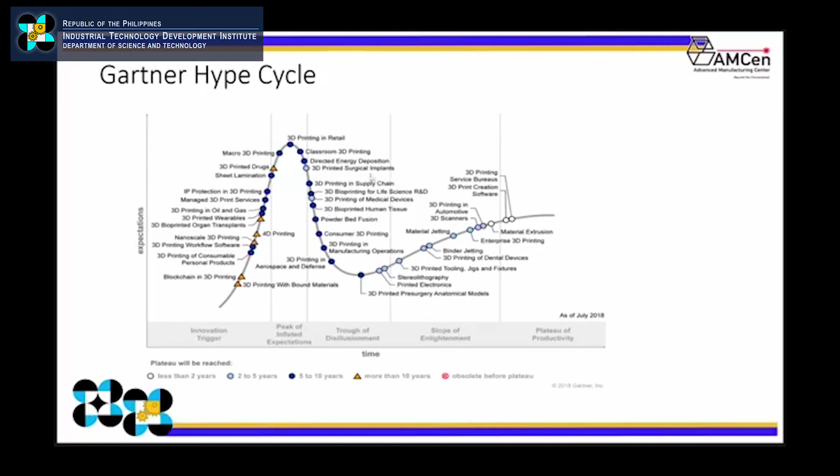Okay, thank you Engineer Margarito. Yes, Dr. Leslie, you are to add something? Yes, I would like to add to the question on 3D printing of liver.

This is a very interesting area of research. In fact, AMCen is going into bioprinting. For now, the 3D printing of liver is at its experimental stage. In fact, countries like Japan, US, Brazil are doing 3D printing of liver. And there are aspects we need to consider regarding the material to be used — this should be biocompatible. Usually they use hydrogel, and it should create an extracellular matrix that should be biocompatible.

And for now, they are getting cells from the patient to impregnate with a 3D printed liver. And in Japan, they started to use a liver patch which is being 3D printed. So they start with a patch first and attach it to the patient before they could apply the 3D printed liver fully to the patient.